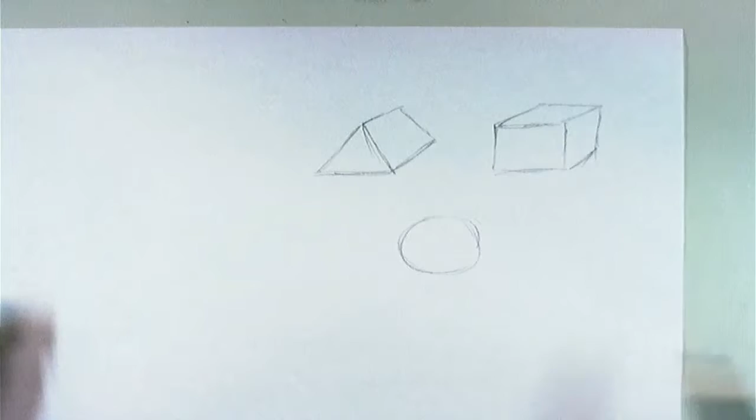So the idea I'm going to go for here is that I just have sort of an equilateral triangular block that goes back a certain distance. I've got just a cubical block, if you will. So a cube-shaped block here that goes back some distance. And then I'm also going to have a spherical block, which, well, you know, that doesn't necessarily look like a sphere right now, but something that can help communicate that in some sketching is some shading.

We know that the underside of a block would be darker if the light was coming from this way. Maybe there'd even be like a shadow on the ground around it. So those are actually some things that you can do. You could even do that to these to give them a bit more of a three-dimensional feeling if you're sketching things, and maybe a little depth, is to add in some light shading or something like that. Think of where your light source is, and on the opposite side of that, if your light was up here, the sun or something, this is what these are going to come out looking like. So that's the first step, is to just conceive of the idea.

Now, of course, the next step we have is we have to figure out, well, what are going to be the sizes on these? And something you can really do is you can say, all right, I'm going to actually sketch right on here. And I'm going to say, let's say this is going to be 3 inches. Now, this is not drawn to scale, so this is definitely not 3 inches tall, but that will still communicate our idea. Maybe the distance from this point to this point, from the front to the back, is also going to be 3 inches. Actually, that might be a little weird. Let's do 2 inches. Let's have it be shorter. 2 inches.

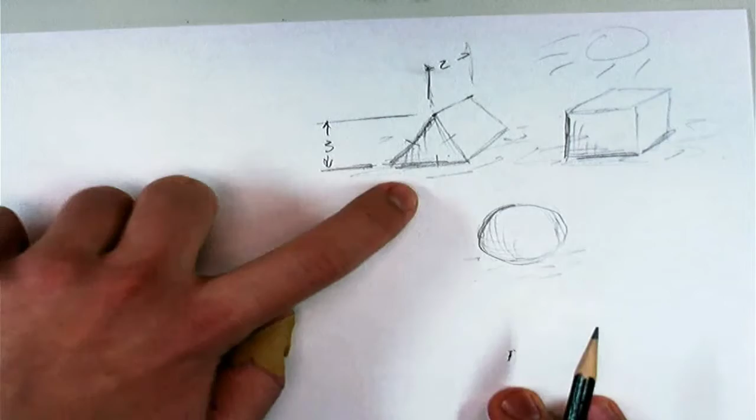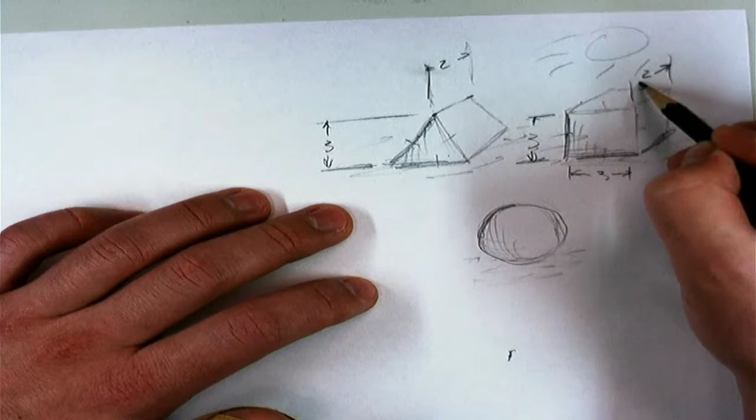And then I also know, let's see, I've got the height. Oh, and if this was equilateral and all these sides are the same, you know, we could put little hash marks on them to show that. This is obviously a square here, so let's stick with the same amounts. Let's go 3, 3. And remember, the way we sketch our dimensions should be the same as the way we draw them. A starting point, an ending point with the arrows in between. And then let's go for our depth. Let's go back about 2 inches. So this can really help to solidify the sizes that you're thinking of.

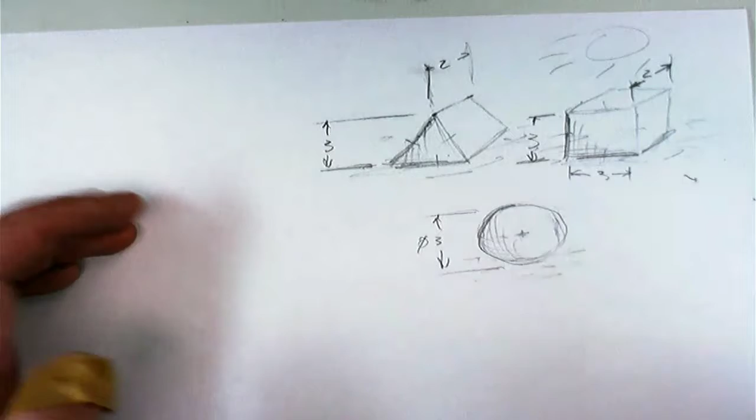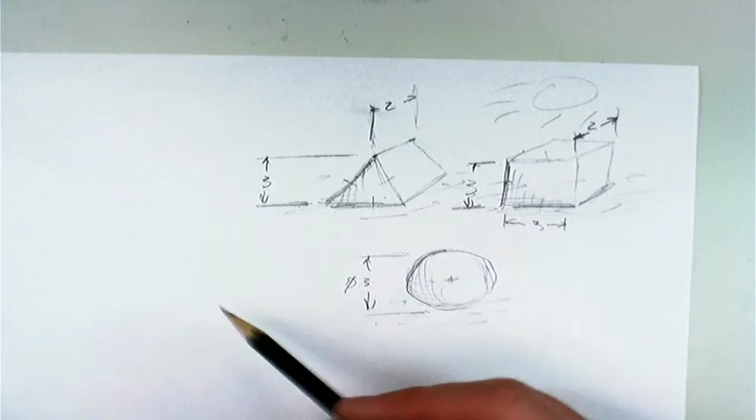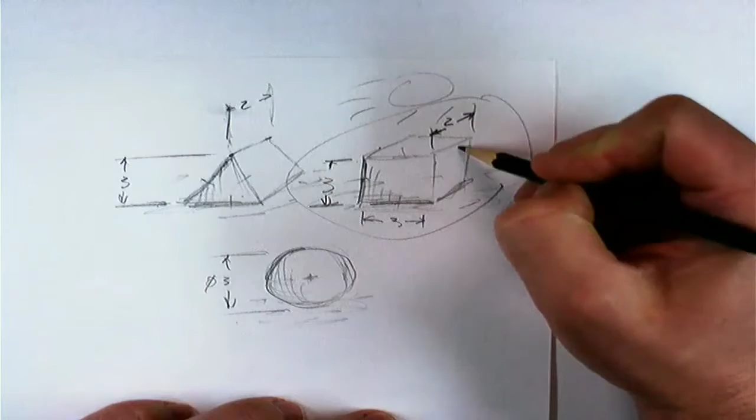So cool. So we have the rough sizes down, but now let's get these into like a front, top, and right side view. So we're going to have to think a little bit about geometry. I'm going to start with this one because it's definitely the easiest. I'm going to actually grab a separate sheet of paper here because I think it will make it simpler. I'm going to keep this off to the side and I'll pull it in when we need it. But so we're working with this cube shape, which we actually said is 2 inches deep. So you know what? I'm going to make that look a little shorter because it's going to be shorter than it was long.

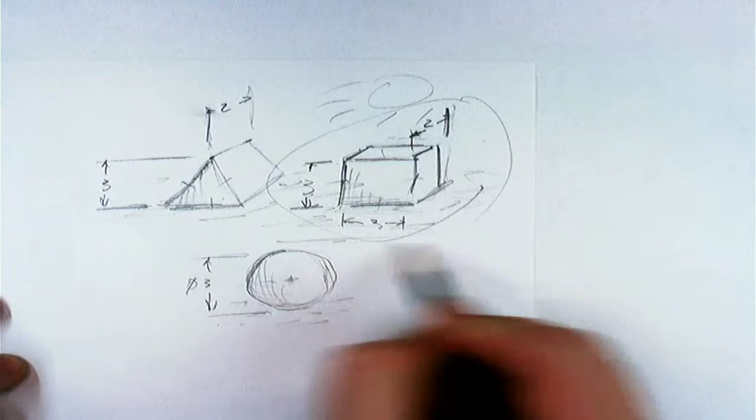Right about there. Cool. Great. Now, okay, square. So our front view of the square, imagine that we are a person. If this was all the ground all over here, we are a person standing with our feet on the ground right in front of this, and we are looking with our eyeball. That's our eyeball. We're looking right at this front surface. So we're going to see a square, and that square is going to be 3 inches wide and 3 inches tall.

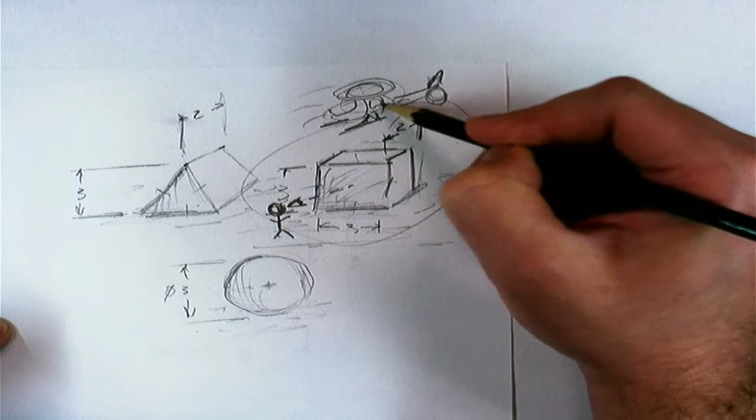And then we have to think, how's this thing going to look from the top? Well, we can imagine that we are in a helicopter. I always like to use a helicopter. There's sort of the tail of a helicopter, that spinny thing on the back. There's like the cockpit window thing. There's a little skid so it can land. Beautiful. We are like looking down from this. Here's a door with a window. There's a little guy and he's hanging out of this and he's looking downward with his eye and he's seeing this top surface.

And the way we do that, remember, you don't even have to think that way. We can just project lines up, and of course we'll be using our T-square and our triangle. Project lines up and then set a line for the starting point. We know we should leave in between here about a 1.5 inch gap when we're actually drawing it. So that's the front, and we know that the distance going backwards we said was 2 inches. So if this was 3 inches, break that into 3 parts. From here to here is about 2 inches. So sometimes I even bring my fingers and I don't move them, and I say, there's my depth, 2 inches deep.

And this is still the sketch. Okay, 2 inches deep, and we can label that. Let's label it on the same side. We'll put a 2, our arrows. And now we have our block sketched out. So this is what it's going to look like when it ends up on that piece of green paper. And I'm going to go through how to put these on the green paper later on here. But let's do the rest of these now.

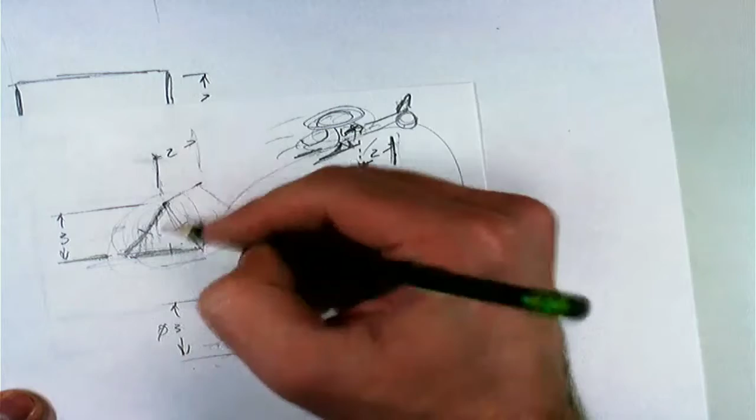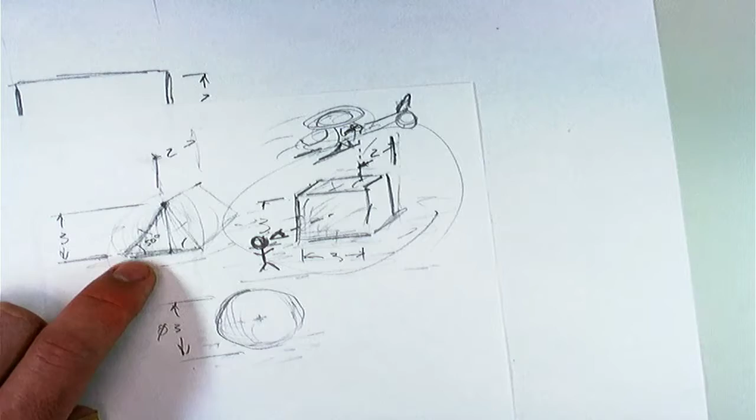Let's look at this triangle here. Now this is a little trickier because we have to say, well, how can I make sure that all the sides of this triangle are actually going to be equal? Well, I definitely know that, let's see, we can't do a circle because that would be bigger than what we want. What I can do is I can break this into 2 triangles, 2 right angle triangles. And if I know that this is 3 tall, I can draw a line up that's 3, and I'm going to also know that all these are 30 degrees, or am I mistaken? There's 180 degrees in a triangle, so 180 divided by 3 is actually 60 degrees. Excuse me. So we'll have 60 degrees for all the sides of this triangle. And with our 60 degrees on each of these triangles, we'll be able to do the rest of this.

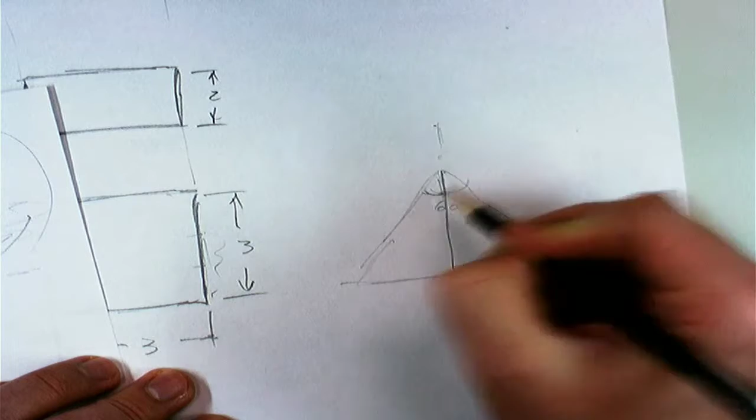So if we think about this, we would have a 3-inch, well, let's go like this. We have to think about the geometry. When we're drawing this on a piece of paper, we're going to start with some point. We're going to go up. We're going to draw a 3-inch construction line up. And then, if this whole angle here has to be 60 degrees, then this angle would be 30 degrees. And when we're drawing this on a piece of paper, we're going to be able to get our triangle and our T-square. So I'm just pre-thinking how I'm going to draw this so that I can figure it out. And we can use our 30, 60, 90 triangle. Oh, look at this right there. Oh, that's the wrong side.

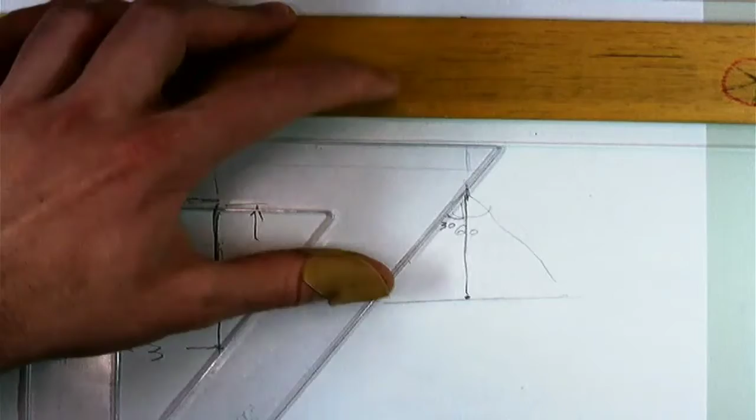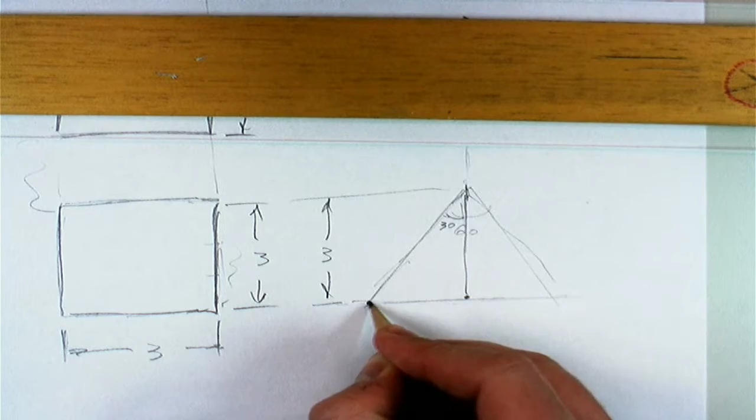And we'll be able to draw a line up. We'll be able to line up our triangle, get a 30-degree line down. Right, from there, we can flip this around, get our 30-degree line down. And remember, we had made this line 3 inches, just like we wrote in our dimensions on our original sketch. It was 3 inches tall. And we can draw these 2 lines coming down. And then we would just connect these 2 from the bottom of the line, draw a line across. And again, I'm going to show how to do this later, but I'm thinking about it now as I'm sketching, so that I can make this all work real nice. All right, so that would be how we would get our triangle drawn.

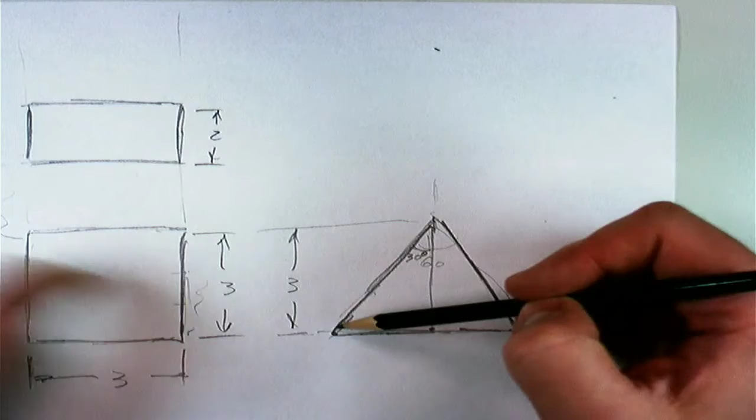And now the next step, of course, is to get our top view on in there. So just like we did for our square here, we would bring straight lines up for all of the edges. And that was a little uneven, but that's okay. We would space them 1.5 inches apart.

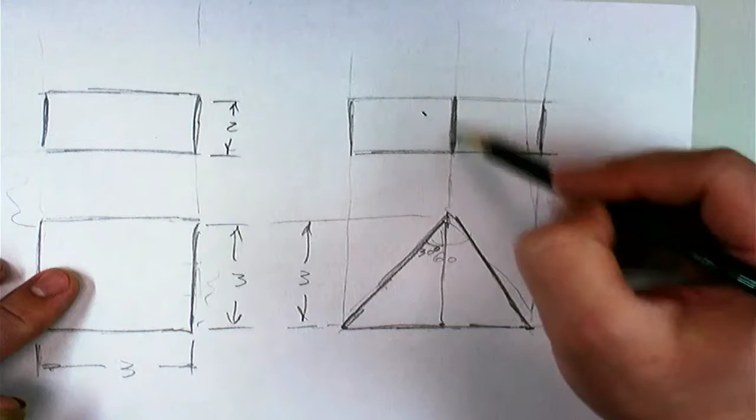And then we said that this one is also going to be 2 inches deep, just like the other one. So I'm going to look at that. It's going to be the same size there. And really, this is going to look very similar to the first one. It's just now there's a line in the middle, because if we're seeing a triangle from the top, that is what it's going to look like.

And I'm going to grab a toy here, so you guys can see this. I have some shapes. Right? Here is a triangle shape, equilateral right there, front view, top view. We're going to see that line right in the middle, and we're going to see the edges around the outside. So just to show you, a really straightforward example there, that is what that's going to look like from the top view. So hopefully that helps that make sense.

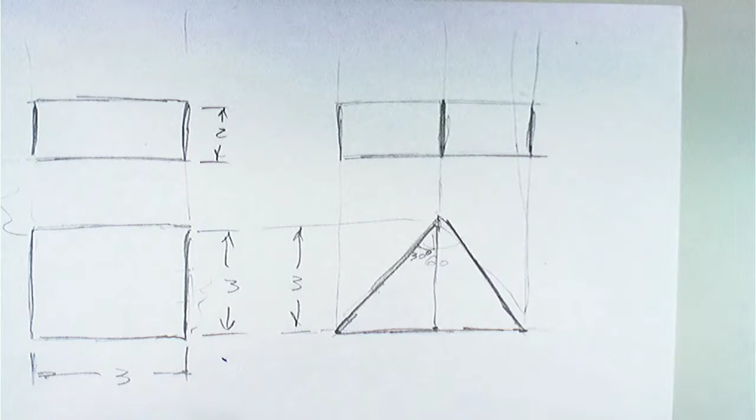Our sphere is, with a fresh sheet of paper here, really just going to be a circle. And you know what? I don't think we need to draw a front and a top view for this, because this is just going to be like you put a pencil compass on here and you're going to open it up to half of 3 inches and you're going to sweep that around. And then you can put a little note over here that says this object is spherical. And there you would have your drawing. So that would be that spherical part of that. You could get away with just doing one view for that, and that's okay for this assignment.

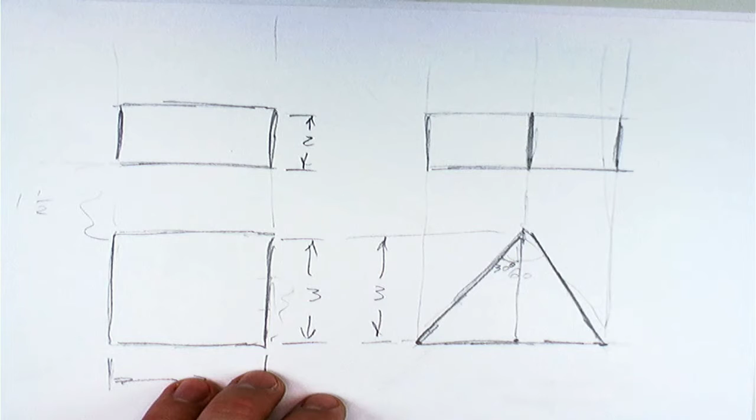So this is how you would sketch these out. I'm going to keep going, and I'm going to have how you would actually draw them now, so stay tuned for that coming up here momentarily. All right, so now I've got my green paper taped down here. I am going to go through and show how to add the title block to this, just in case there is anybody who still needs to see how we do that, needs a refresher, since this is in fact the first assignment of this course.

So I tape my green paper down with my T-square, using that to make sure that it's nice and straight. I am going to lightly mark. Actually, I should be using a 4H pencil. This is a 2H pencil. Do I got a 4H here? There you go. Where's a 4H pencil when you need it? I'm going to use a 4H pencil so that it's nice and light and I can come back and darken it later. But I'm just going to make a mark using the acrylic there as a spacer.

From the top of my page, I've got this taped on here so this doesn't work so well. So what I'm going to actually do is steal this distance by making 2 marks on a white sheet of paper. And I'm going to bring this up here and just line one of them up with the top. Otherwise, I'm going to bump into something with my T-square. So you could keep using the acrylic if you've got room, but because I'm working on this document cam surface, it doesn't work for me. So I use that to mark my distance.

And then, if you've got scratches on your triangle here, you can use that as the spacer to get your side marks on here. So I'm going to line up. It's hard to see with the glare right now, but I'm going to line up that line here with the edge of my paper so that I can get that distance. And then again, I'm in a weird situation because of the surface I'm working on here. I have to do this in 2 parts, but you should be able to use the long side of your triangle and line it up like this and just do the whole mark straight up. So do problem solve on your own there, but you can use my strategies.

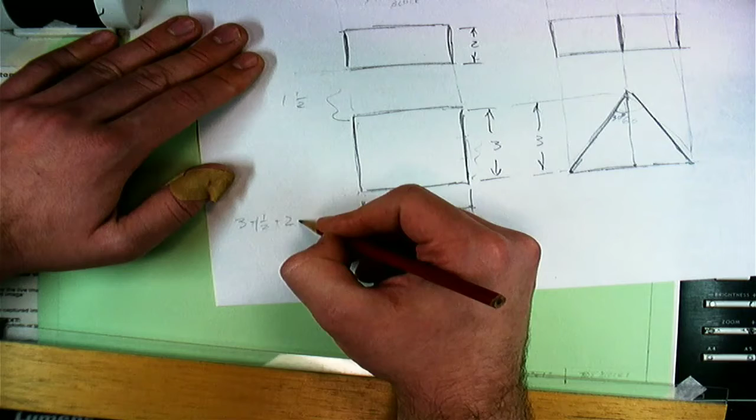Well, to figure out if it's going to fit, you can measure across here and say, how much room do I have to work in? Well, it looks like I have about 11 inches this way, and I have about 7 3/4 inches vertically. So if I can just make sure that everything is going to fit in that space, it's going to work well. I have a total of 7 3/4 inches to cram all this in this way. This is 3 inches from here to here, right? Plus 1.5 inches plus 2 inches. That's 3 inches, 4.5 inches, 5, 6 inches, 6.5 inches. Well, 6.5 inches is definitely less than 7 3/4. So this is going to fit vertically.

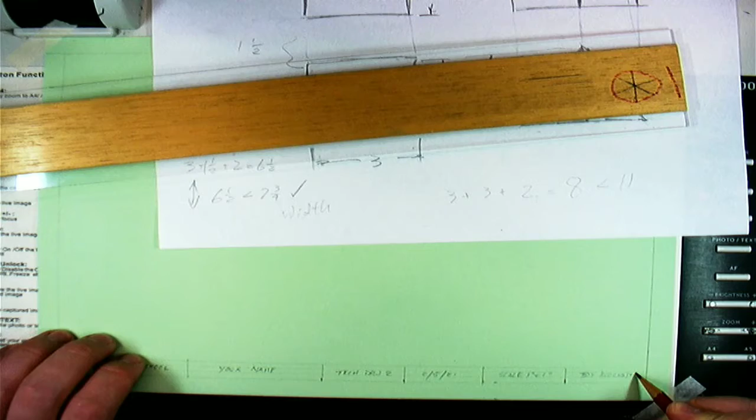And then let's look at the width. It's going to be 3 inches wide. So this was height. Width. 3 inches wide. I said I have 11 inches to work with. Well, the whole thing is only going to be 3 inches, right? So I may actually be able to get both of these on one piece of paper, because if I leave 1.5 inches between them, this would be 3, 6. Maybe I could even leave 2 inches. So 3 plus 3 plus 2 inches in between them, that's 6, 7, 8. 8 inches is still less than 11 inches for my total width of my green page. That's going to fit. So I'm going to actually change this to toy blocks 1 and 2. And like I said, I'm leaving 2 inches of space in between them.

So the total height of this, if I'm trying to lay out these drawings on this page and I want to center them, the total height of all of these put together, if I were to draw a big box around them, like with this highlighter here, I want to know how much this drawing area is so I can find the center of it and then go 1 inch out to start this drawing, because I left 2 inches in the middle, and then 1 inch this way to start this drawing.

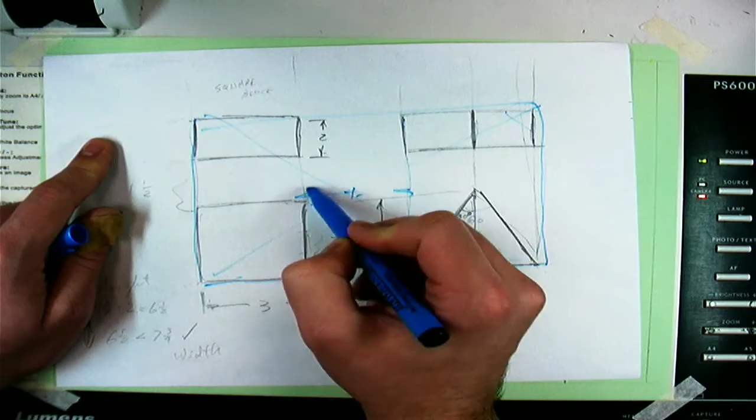So the idea is chopping things up, breaking them down, finding a point you can work from, and going off of there. So I am going to calculate that total height. Well, we figured that out. It's 6.5 inches, 6 1/2. And then this overall width here was going to be 8 inches.

So basically, if I find the center of this and I come over half of 8, that is 4, right? If I come over 4 inches, so from here to here is 4 inches, and then I come down half of this distance, which is 3 1/4, that is going to bring me to this point. I can draw this drawing, then I can go over 2 inches, I can draw this drawing, and it's all going to fit on this green piece of paper.

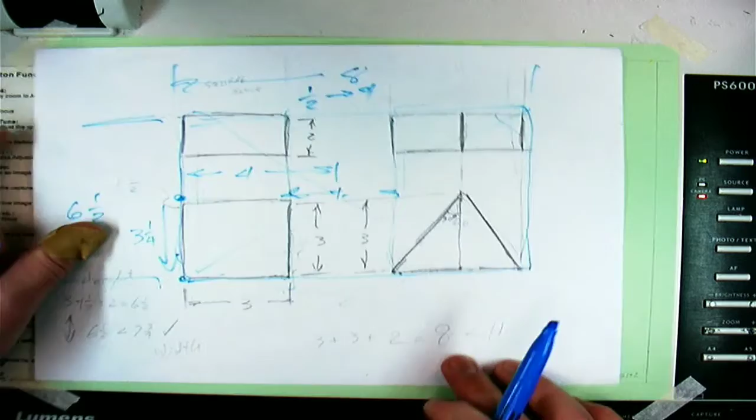So that's what you gotta just think: how can I break this down? How can I make this easy for myself to make sure that it's going to fit? So I'm going to start by finding the center of the whole sheet of paper, because I want this box to be centered on the whole sheet of paper. And then I'm going to find that point, and then I'm going to start drawing my block.

So to find the center of the whole piece of paper, we know we can use diagonals, or we should know. So I'm just flipping my T-square over, making sure the two corners are touching. I'm going to draw a light diagonal line there, and then I'm going to find the spot where everything crosses this way. All right, so that's the center of my page.

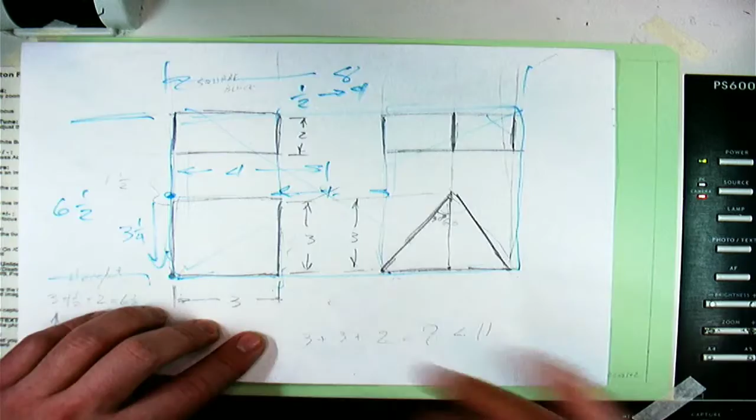And now I want to go over 4 inches and down 3 inches from there, which I am going to do like this, over 4 inches. And I'm cheating. I'm not really using the T-square right now, but it would be good to, so make sure that you do if you can. But for this part, we can just kind of eyeball a little bit.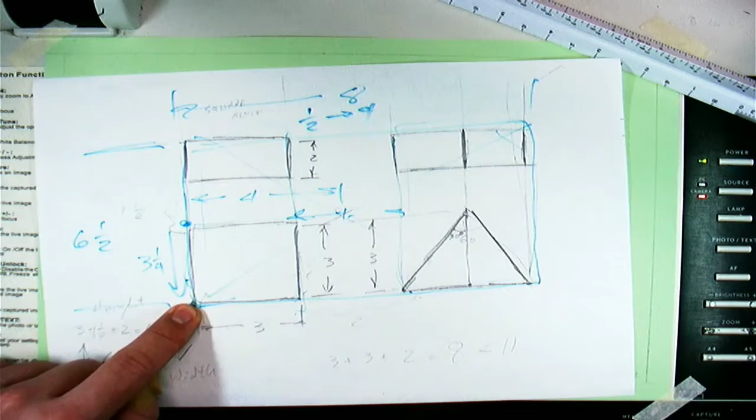So I'm coming down 3 1/4, and that's going to give me that corner right there, which corresponds to this corner for this block. So I know that if I start drawing this now, I'm going to have a line that goes 3 inches, 3 inches. I'm basically going to draw a 3-inch square.

So I'm going to make a light line of any length, and then I'm going to mark on that line 3 inches over. Then I can come in with my triangle, and I can make a line that goes straight up through that mark. And then I'm going to mark on that 3 inches as well. 3 inches up is about there. Then I can bring that line straight over.

I already know where this part ends, and these are super light, but you should still be able to see them, because we want to keep everything super light. Come up, and there is the rough outline of my square. To create the top view, I'm just going to bring more lines straight up. Well, I've already got them, right? So we'll project these upwards. I got to try not to bump into anything there.

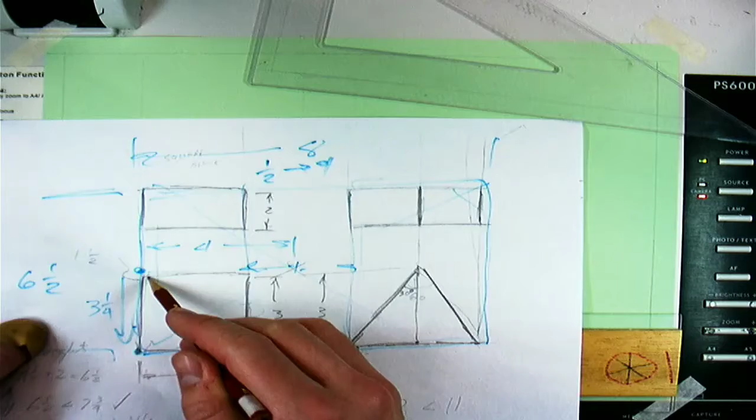And we know we have to have 1.5 inches between the views. We wrote that down before, so I'm just going to measure up 1.5 inches. And I'm going to hope and pray that this all fits, but I think it's going to. This is going to be 2 inches deep, so I'm going to measure up 2 inches from my 1.5 inch mark and draw 2 horizontal lines. And now I've got my block drawn.

I just need to erase and darken these. And I can do that very easily using an eraser shield. I get in here, clean things up. And you might actually want to darken the lines and then erase. But anything like that is going to work for you to clean this up so you can get some nice looking drawings. Because then you're going to want to come in last and darken these lines by going back over them with your H pencil.

I like to do horizontal lines first and then come back and do the vertical lines second. There we go. Vertical. Vertical.

Vertical. Vertical. And we will carry on, and I'm going to go on to the triangle next over here. So I'm going to keep going with this. But if you get this now, you can stop or you can just keep watching.

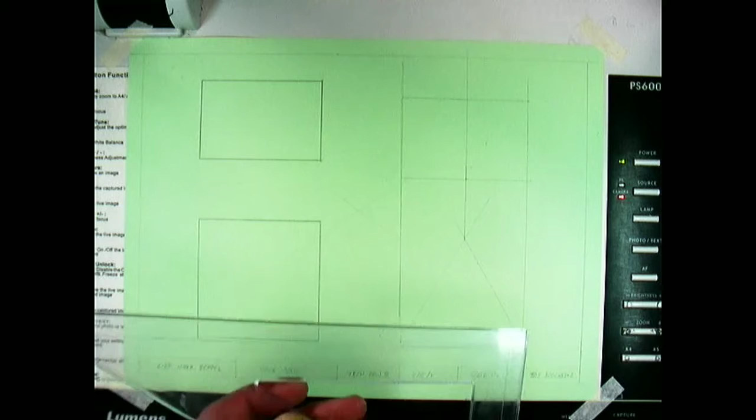And you know what? It's not perfectly lined up. We're going to roll with it. The spacing here is 1.5 inches. There are probably better ways I could have done this, but it's totally fine. Okay, remember, this is just a kind of opening drawing. I'm going to get in here and darken my lines now. So I can use the same tools I just did, but I want to make the lines nice and dark. Now I'm using an H pencil. Flip around, darken these.

I said I'd use the inner line, right? So let's make sure we're using that. Oh, I got like a weird shadow going on there. I don't like how this looks right here. That's a little better. Oh, I forgot the middle line. Cool. Now I have my front and top views of the triangle.

All right. The last step here is, of course, to add on our dimensions. And we already figured that out when we were sketching. So this is going to be 3 inches tall, 3 inches wide, 2 inches deep. And this is nice and simple. So I actually would want to put this dimension up between the views. So that's where I'm going to put it up there. And these two are fine on the sides like that. That'll be okay.

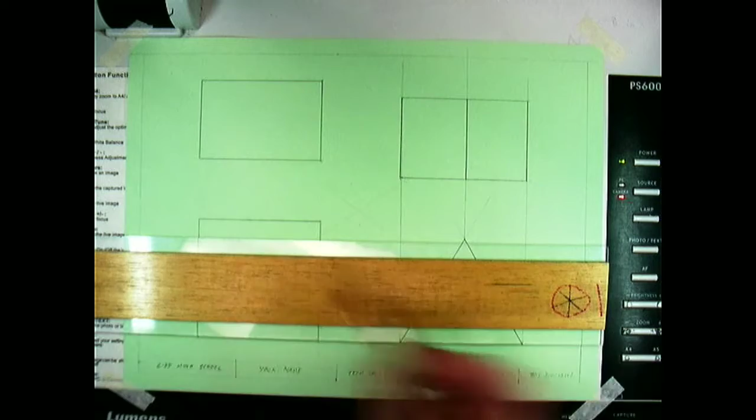So remember to space our dimensions. The real distance away that I want that arrow line is about the thickness of this plastic on the T-square. And those lines are going to come up, and we're actually going to leave gaps there. I should have done it in my sketch. I did it in all the other spots. We're going to leave a gap. So watch how I add this dimension right here. All right, remember, this is going to be 3.

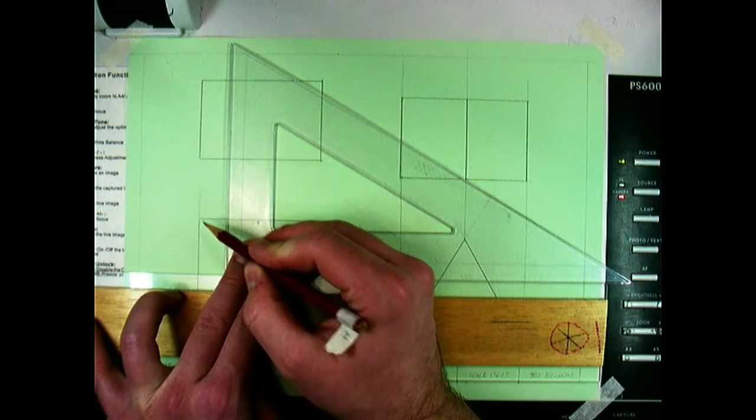So this is the technique you should use. I'm going to slide the T-square until the wood is right on that line. I'm going to lightly draw a line across. I'm going to get in here with my triangle. I'm going to get some vertical lines, and again, light so that we can darken them later. And I left a little bit of a gap. It's pretty hard to see, but there's a gap there. So it should not be touching the corner. About 1/8 of an inch gap if you want to actually measure it.

And then what I'm going to do to get the 3 in is I'm going to lay the widest opening on my eraser shield right on the line. And there's some glare there, so it's probably hard to see. But the dimension line is right in the middle of that opening. And I'm going to just write 3. And I'm going to make sure it doesn't go outside of the eraser shield. And then I can just darken everything in.

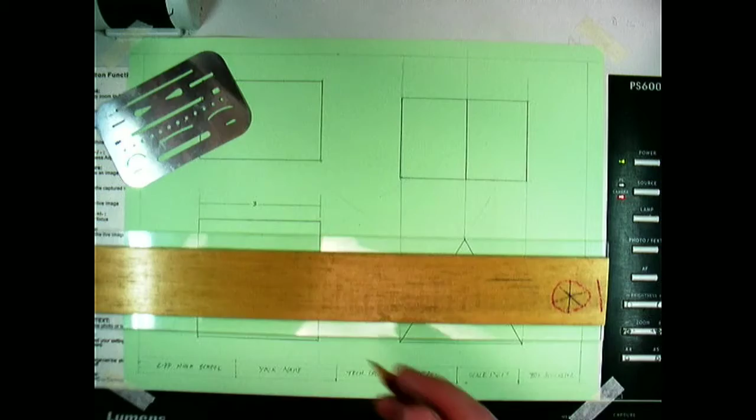And I was using H for just sketching. But when you darken this, you should use 2H. And that's going to give you nice, thin, dark lines that will be the correct heaviness in order to give you a nice, crisp-looking dimension line there. And, of course, if you've got little dangly lines, like I've got some stuff hanging off of the edges here, you can get in with the eraser shield and lighten those up as you need to.

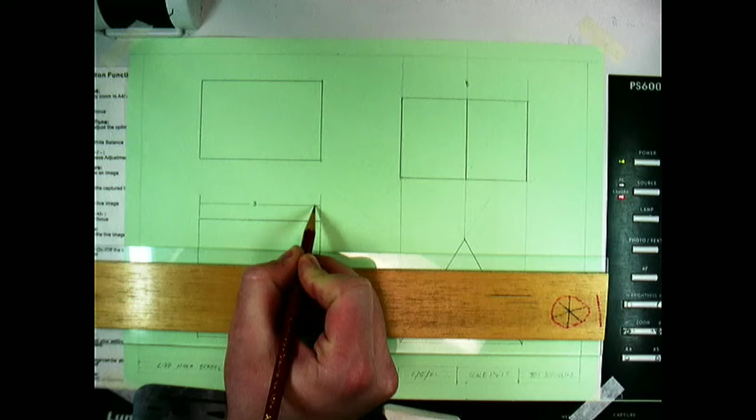Bam! And the last step would be to add the arrows. I would recommend putting all your dimensions in and adding the arrows very last. But if you want to do it one at a time, you can. It's just frustrating if you have to move these around. So I'm going to do this one. This one's a little different because the arrows are going up and down. So we'll use this triangle again.

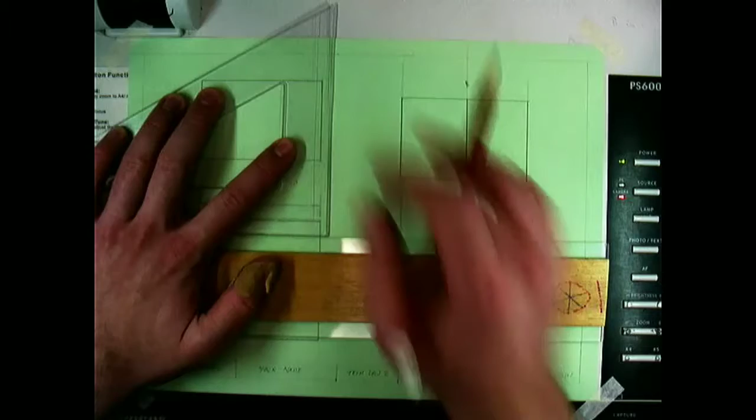Remember I talked about these scratched lines? Well, that scratched line is the same distance, because I scratched it on there with my pencil compass, as the acrylic on this thing. And I got to block out the light. There we go, because I'm getting glare. Okay. And I'm going to do the same exact process. I'm going to lightly draw a line like that.

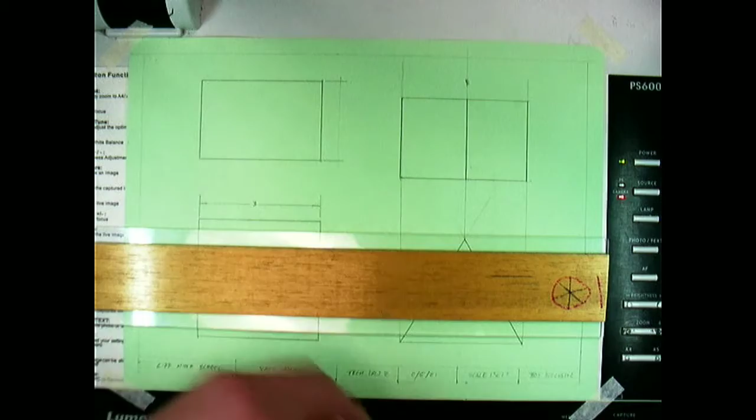I'm going to draw a line that extends off the edge, leaving a gap. Line that extends, there's a gap. So you can see the gap pretty well there. This gap actually isn't super clear, and we could make it a little more clear by using the eraser shield here just to clean that up. That's better. And this distance was 2 inches, so I'm just going to put in the middle, using my eraser shield again, a 2, and then I can darken all the lines and put the arrows in.

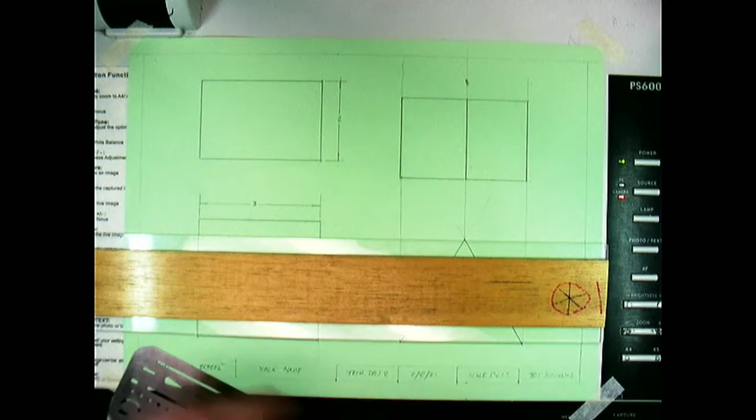And actually my extension lines, which are the ones on the edges that extend off of the object, are about dark enough already. So I'm just going to darken the dimension line, which is the one that gets the arrows. Long and thin arrows. They should be pretty subtle, but they're there. And I don't like this little bit that's sticking off there, so let me just clean that. And we need another one that lines right up with this down here. So I'll put that in. And you just keep going like this, extending your lines in the spots where you need them.

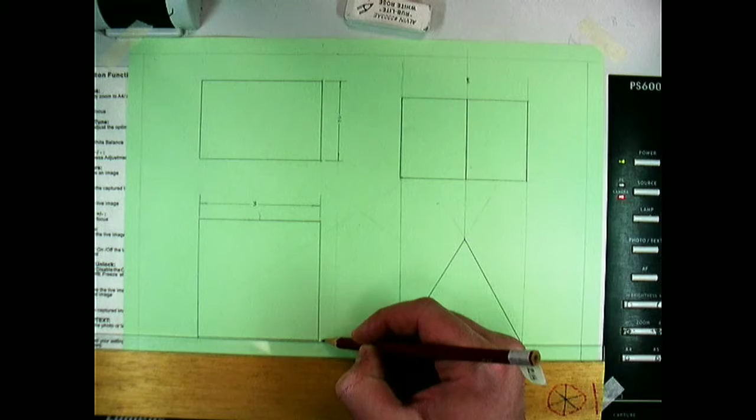Extension. You can actually draw the extension lines first. Maybe I'll do that for the triangle when I go through the triangle, and then come back and draw these lines later on. You can even leave a gap right away for where you think the number is going to go. The order doesn't actually matter. Like right now, I could darken this and leave a gap. As long as you are planning correctly, you'll be okay. I'll put a 3 in there. I'll put some arrows on. So that's all set now.

And let's just do this triangle over here. And I'm actually going to gently erase some of these extra lines because I think they're kind of getting visually in the way. We didn't need that one. We didn't need this one anymore. These were a little extra. Bam. Beautiful. Okay, those are off there.

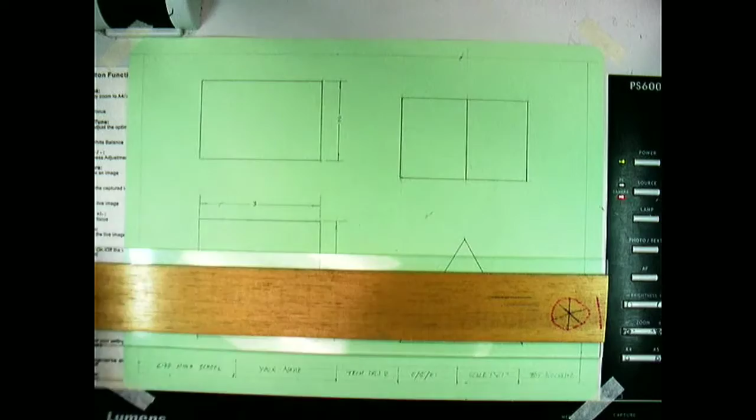And now, like I said, initially we said we were going to put the height, but I'm not going to do that anymore. I'm just going to do this side. Really, I could do dimensions off of all these sides, or I could put a note that says all sides equal. Okay, so that would work too, and I think that's the route I'm going to go. So I'm going to put this dimension on the bottom. So I'm going to go like this. I'm going to line the wood up with the bottom of the triangle.

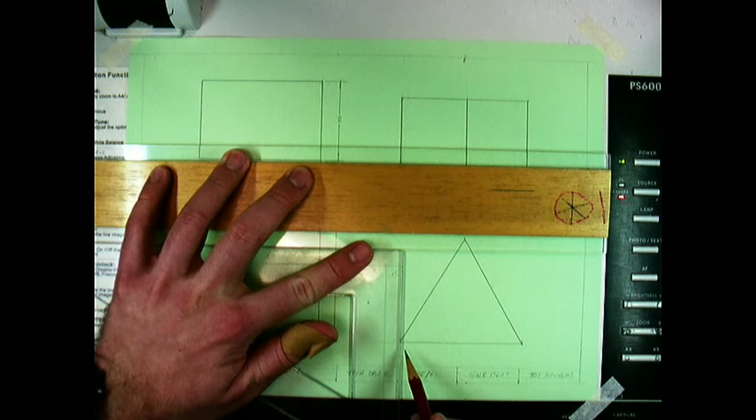Oh, you know what? I said I would do it where I do the extension lines first. So let's try it that way. So instead, this time, I'm going to go like this. And I'm going to draw, leave a gap, leave a gap, and then I'll line the wood up. Now I'll add in the line in the middle. Well, I did it a little dark, so I can erase a bit here just to leave myself an opening to write the number in. And we said this is 3 inches. So I'll write inside this again, 3 inches.

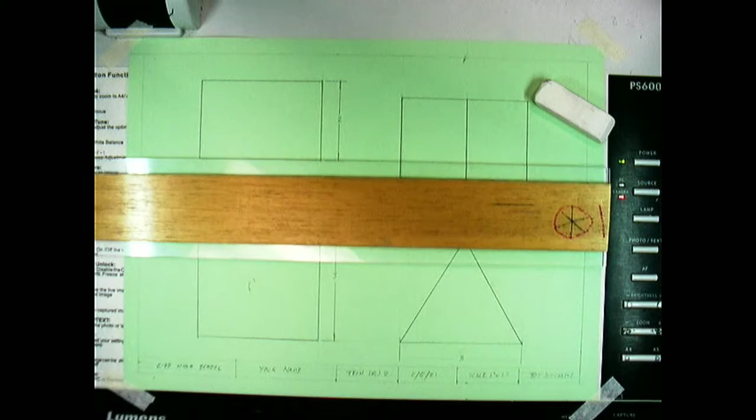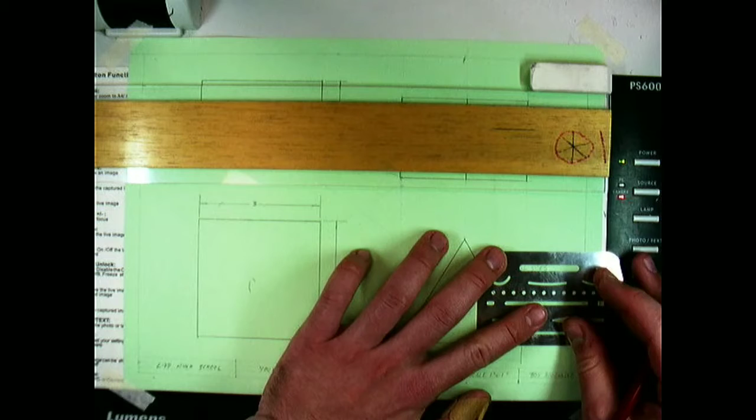Neat. And then, like I said, I'm going to put a note that says all sides equal. And I'm just going to do that here. I'm going to make sure this is straight. I'm going to look at it carefully, visually, and line it up. I'm going to say all sides. And if I have to slide this over, I'm going to be careful that it's still lined up, equal. Okay.

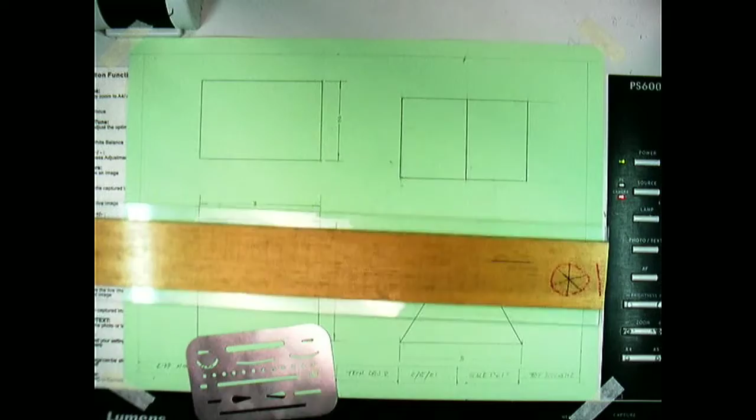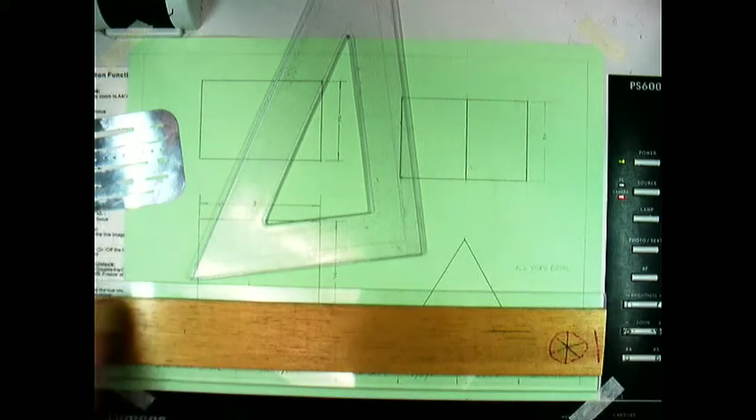And, oh, I got to do the depth, right? So like I did before, how about I try adding these extension lines first? So we extend the edge, leaving a gap, extend the edge, leaving a gap. Oh, and that's not a very good gap. So again, I will clean it. Okay. And then let's use the line on our triangle. Like that. Leave a space for the 2. And I'll write inside my eraser shield, I'll put a 2. And, you know, I'm going to shorten these a little bit too. That looks good. Great. And let me just add some arrows.

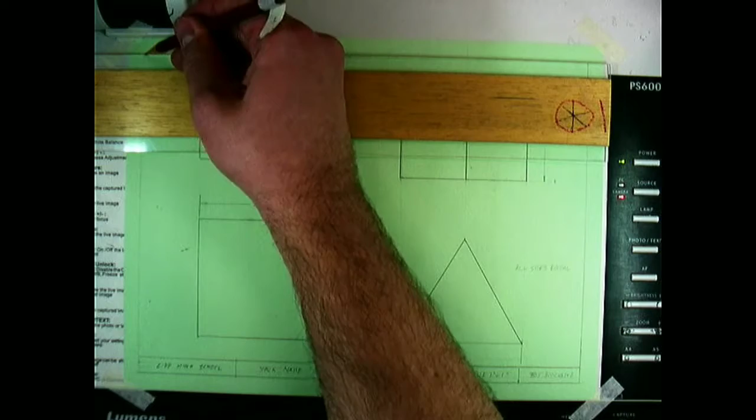And now, voila, you have completed this. Oh, aside from darkening the border, so that would be the last step, is to come along here and darken all of the border edges so that it looks nice and crisp. You don't have to darken the little guidelines we use down there. You can just go like this and go around the outside of that title block. Do your top line up here and do your vertical lines.

Why am I still doing this?

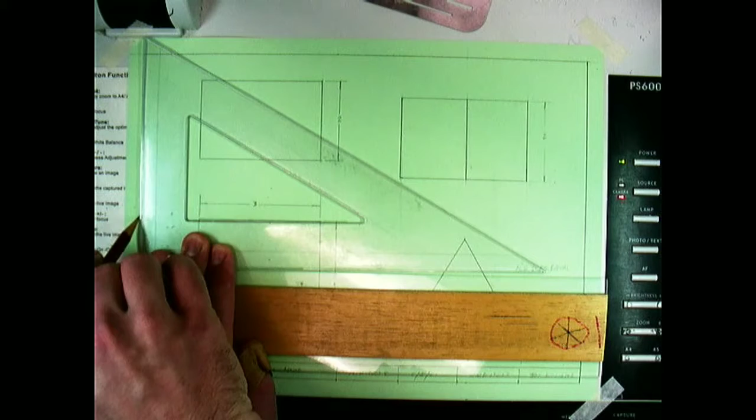And this vertical line, as you recall, I have to do this in 2 pieces because this arm gets in the way up here, the camera arm. Hey, there we go. That looks pretty good. So that there is a finished drawing, not a lot of lines. You can peel back this tape, get that off there.

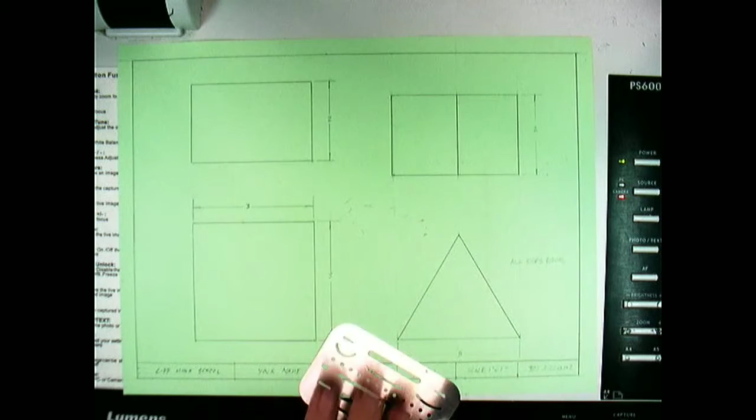So I will do the circle last. Oh, I don't have time right now, so I will finish that up, but I will have that in this video too, and you can watch all of this if you need it. If you're good, though, you can probably go right now and go start working on stuff. I'm going to also clean up. There's some other spots on this where I still see some lines that I don't really want to see anymore. So gently, if you're getting close to an object or you have a corner like that, you can clean it up by using your eraser shield. So there we go. There's a nice drawing. Really looking good, and all set.

All right, so this part of this video is going to show how to create a spherical object, which obviously is not super exciting here. It really just is going to look like a circle from both the front view and then the top view. Now, we would still project up and we would show it in the top view, and that would truly be the clearest way to show it, would be to show that in the front view and the top view, it is still a sphere. It looks a little smushed. That's because this lens distorts things a little bit, but you have to trust me that this is a circle.

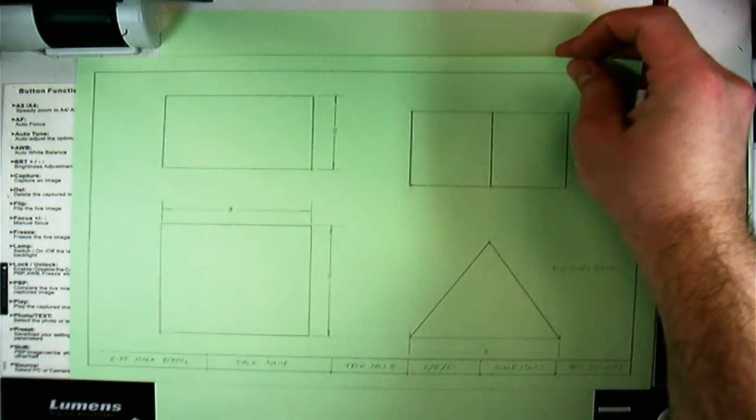The reason I'm doing this, if you'll notice, this paper is turned sideways. This is not the normal way that I would orient a piece of paper when we're drawing, but there's no reason you can't turn a piece of paper this way. But the reason I'm doing it this way is because it's just not going to fit if we do it the other way. It's actually going to be really tight.

In fact, if we think about how big this would be, if this has a diameter of 3 inches, and we need to do a front view and a top view, and this one is also 3 inches, and this gap in between is 1.5 inches, that's going to be 7.5 inches. That's going to be incredibly tight on our piece of paper here, where we only have 7 3/4 of an inch to work with. That's going to leave very little room at the top and bottom. So there's no reason we couldn't just rotate our paper sideways and give ourselves more room.

So I'm going to throw a border on this. I'll tilt this down a little. If you think about it, the border, we use the same principle that we did earlier. I'm going to lock this. There we go. Same principle that we did earlier of using the acrylic to get our marks on there, the acrylic on the T-square. So a mark there on the bottom. On the top here, actually, I am bumping into the top of that.

So I'm going to use another quick technique of just marking down on one side 3/8 of an inch and then marking down on the other side 3/8 of an inch from the top. And if you think about it, if those 2 points are both 3/8 of an inch from the top edge of this paper, then I can sneak in here with some object that does fit in. And as long as I connect those 2 points, it's still going to give me the right distance here. So there's lots of ways to sort of cheat the system and still get those distances in the way that you need them to be. I'm actually going to measure 3/8 of an inch in here too.

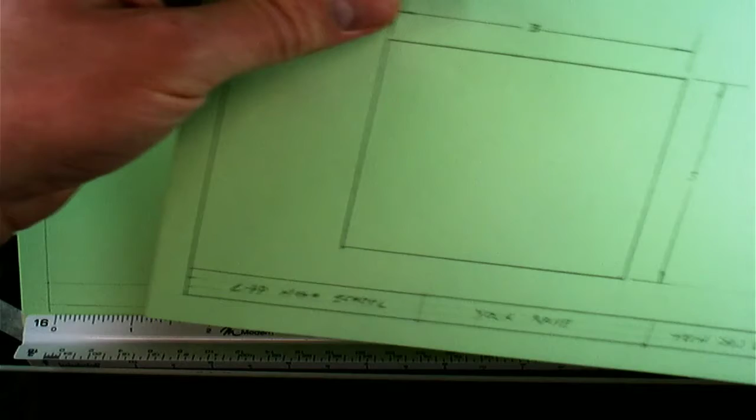But this part does not have to be perfect. Again, it's about the design and less about the layout. It's about the techniques you use to communicate your ideas, and it's less about perfecting the formatting. Because as long as someone can look at this and still understand the design that you were trying to get across, then you are still going to be able to communicate your ideas to another human being, and that's what matters.

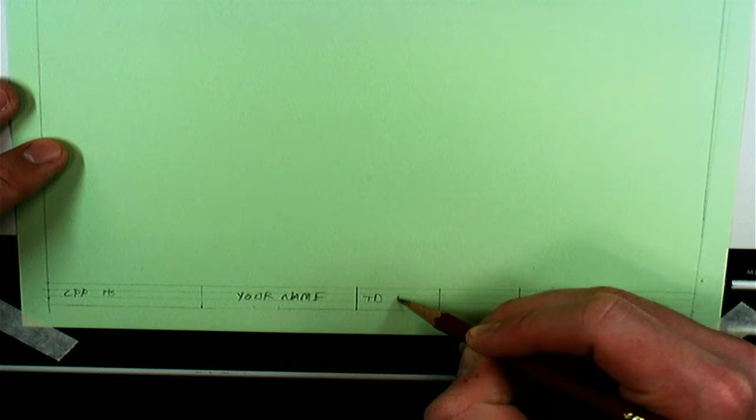I'm just adding my guidelines in now so that I can write accurately on those. Okay, and then I can do CPPHS, and I should be using a 2H pencil, but I'm not. You put your name, tech draw, I'm going to abbreviate to. I'm going to put the scale as 1 inch equals 1 inch.

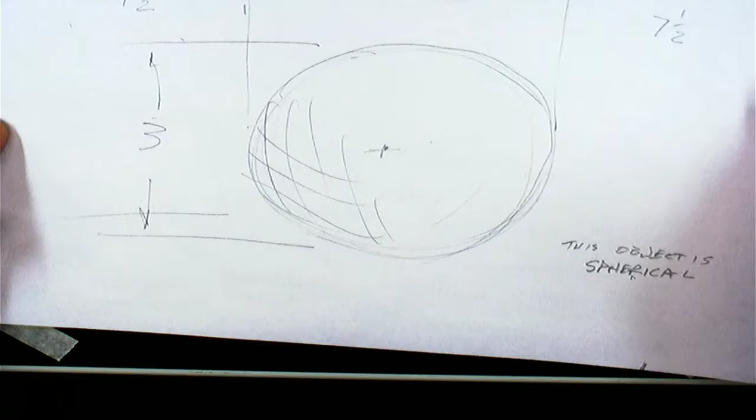Today's date is 2/5/21. And the name of this drawing, we'll call this Toy Block 3. Even though it's really a sphere and not a block, we're still going to call it Toy Block. All right, I'm going to straighten the camera out. Now that you can see how the title block goes on there, I'm going to start drawing this. We already figured out this is going to be 3 inches wide. It's going to be 7.5 inches tall.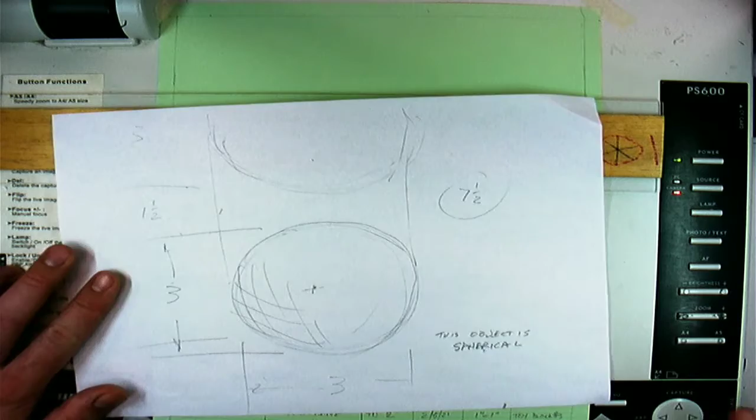Ooh, it is not focused. Focus there, camera. Hey, that's a little better. And let's turn the brightness down and make that a little, yes, contrastier. That's what I like to see. All right, I'm going to lock my menu again.

Okay, so it is 7.5 inches tall. It is 3 inches wide. So I know that I'm going to have to make a 7.5 inch box, and I'm going to have to center it on this piece of paper. We remember we can find the center of a piece of paper with our diagonals. And I'm going to get in here for this way. Let's flip this. I'm bumping into everything. So I'm just drawing diagonals right inside that drawing area. That's the center of our drawing area.

I need a 7.5 inch tall by 3 inch wide box on this. So by that, I really mean somewhere in the center of these two drawings. This is the same center point that's there. I need to come over half of the width and down half of the height. So half of 7, so I'm going to put a little 1/2 here, is 3 1/4. No, 3 1/2 plus 1/4, because half of 7 is 3 1/2. So 3 3/4. There we go. And the distance for the half of the width is going to just be 1.5. 1 1/2.

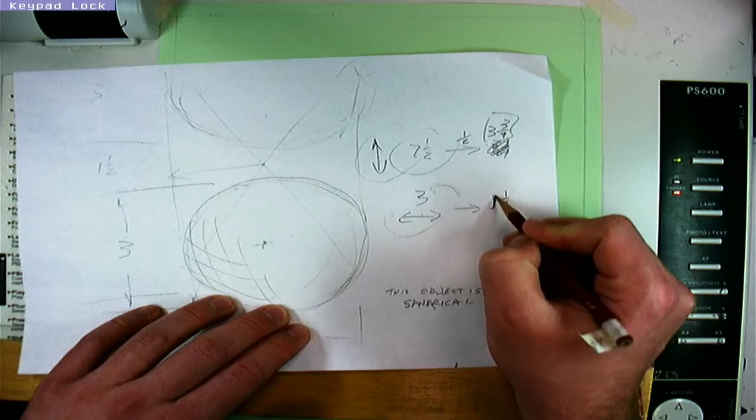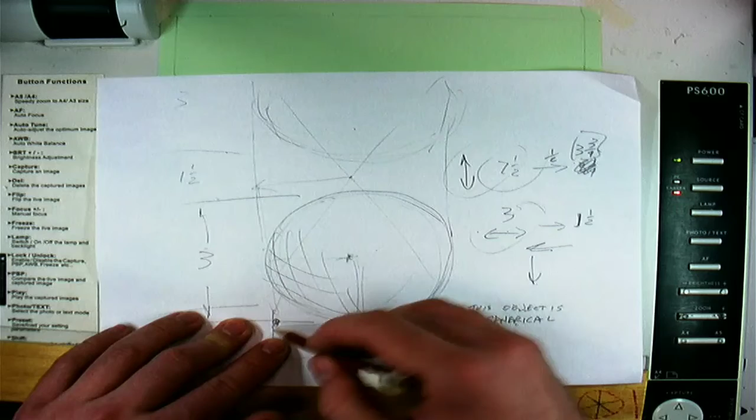So I'm going to come over 1 1/2, down 3 3/4, and that's going to get me to a lower left corner, and then I can find this center point right here. There's lots of other ways you can approach this, but I like to find a lower corner, because then we know from that lower corner, we're going to be able to come over 1 1/2, up 1 1/2 to find that center. It's all about placing it on the page.

If in doubt, I hate to say it, but you could probably pick a spot, draw your circle, and then try to work up. You just don't want to run into the edges of the piece of paper. So actually, now that I'm looking at this, there's an easier way. So you're seeing an epiphany taking place right here. Why would I come over and down to find a spot only to come back up to the middle when I could just come straight down from the center of my page?

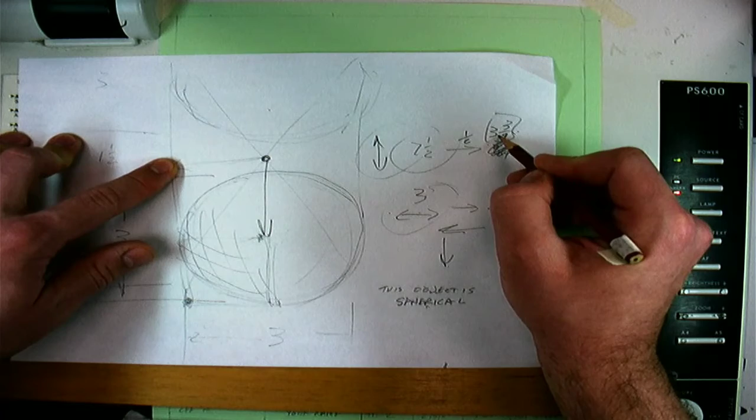Well, we could figure out how far that would be, right? Because if this is 1 1/2 inches up from the bottom, and our total distance down was 3 3/4, that means the distance from here to here, if I do 3 3/4 minus 1 1/2, that's going to get me perfectly to the center of my circle, to be able to space this stuff correctly. So 3 3/4 minus 1 is 2 3/4, minus 1/2 is 2 1/4. So that means this distance is 2 1/4.

2, 3, I'm just checking my results. Yes. So I'm actually just going to come straight down from the center of this. So straight down from the center of my page at 2 1/4 inches. So 2. Now, look at this. I'm not coming perfectly straight down because my ruler might move, but what I'm going to do now, just to ensure that that's definitely the right distance, is I'm going to throw a vertical line down from the center.

And there we go. So my point was a tiny bit off, so I'm going to go like this, and wow, I just found the center mark for that first circle there. So now that I've gotten this far, I know that I need a 3-inch diameter circle. So I'm going to set my pencil compass to half of that distance, which is 1 1/2. I'm going to just measure up 1 1/2 inches on one of these lines. So I put my 1 1/2 mark right on the center of the circle.

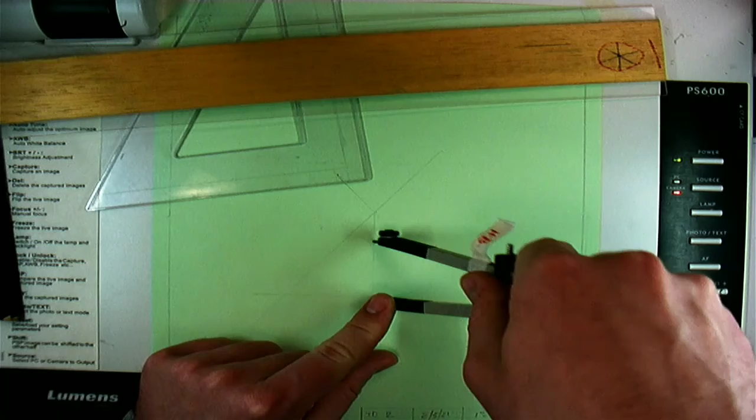And then I'm going to open my compass. Whoop, put it right on this. Wow, I nailed that. Maybe the last time I used this compass, it was 1 1/2. So I'm going to go like this. All right, that looks pretty good. Get me a circle on there. All right, there is my front view of this ball. And again, doesn't look like a circle because the view is a little distorted with the camera.

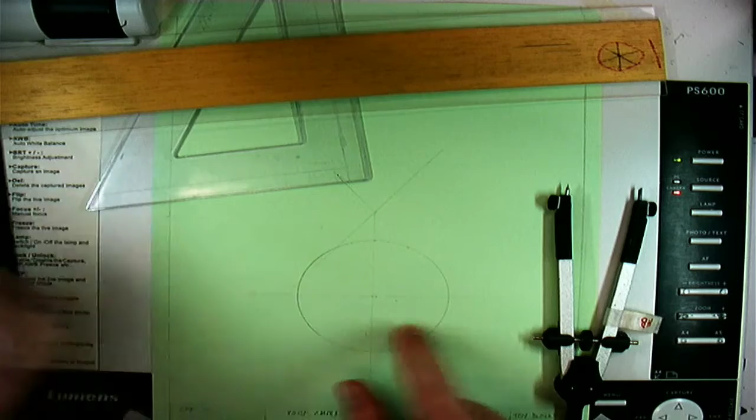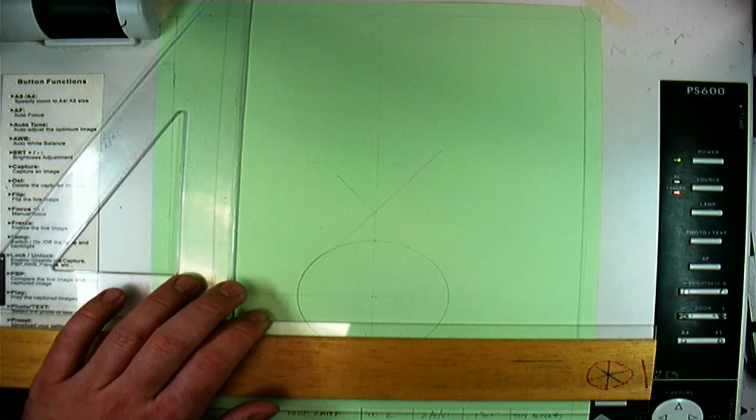That's okay. I need to go up from this 1.5 inches now. So I can measure up 1.5 inches on that line. And that 1.5 inches is the spacing that we're putting between the two views. I'm going to go up again. I'm going to go like this. You know what? I don't see why I couldn't measure up the same distance here, but let's do it a different way. So I'm coming up, there's the 1.5 mark. So this should be the bottom of the top view of my kind of ball-shaped block.

So I'm going to come up from that. I'm going to come up another 1.5 inches. You know what? I could even cheat. I can use this because I know this is set at 1.5, and I'll just put a little mark there. And that's got to be the center of my top view, which is going to be up here somewhere, right? And it got chopped off on the page. So I'm going to make that into a center mark.

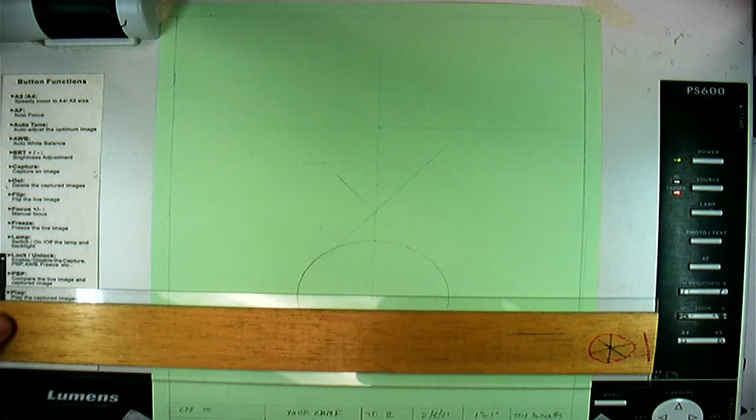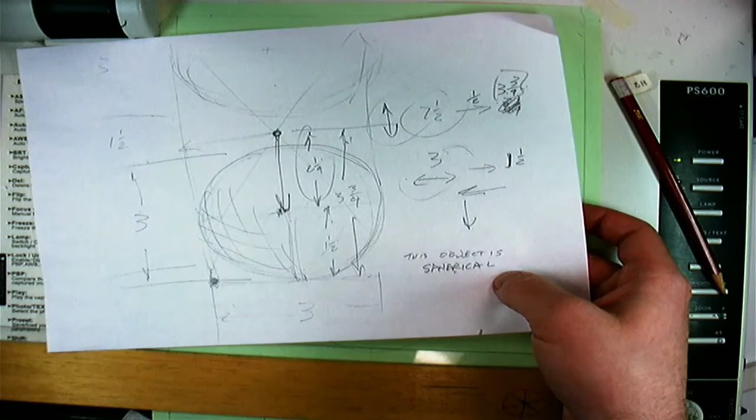All right, and then I'm just going to sweep me a circle. I didn't move my compass at all. And this is giving us the top view and front view of our ball-shaped block. Everything is looking good. Let's clean up some of these extra lines. And you might say, wow, that's a little ridiculous. Why did we just draw 2 circles? I did mention before, you could probably just put a note that says object is spherical. We could still do that. It wouldn't hurt to do that.

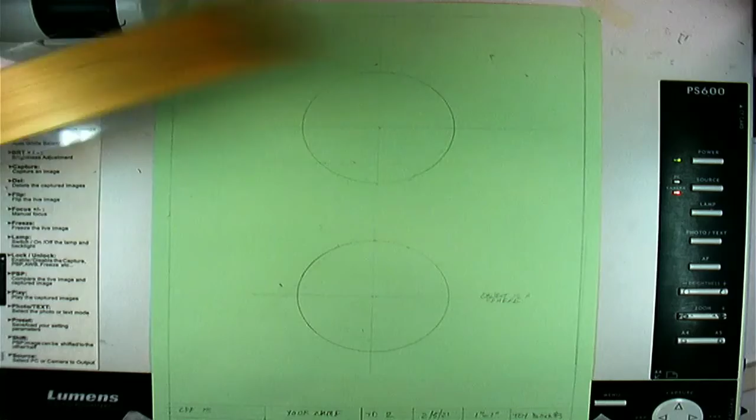So I'm going to put a note off to the side here using 2H to write my note. And I'm going to line it right up. I'm going to just use this line that was already here. And I'm going to say object is a sphere. And that is going to communicate everything that we need about this drawing. So, well, aside from a dimension, right? Now we need to know the diameter.

So if we remember, adding a diameter in a dimension form is super simple. You're just going to line up some straight edge so that it is going right through the center of the circle. And you're not going to draw a line all the way from the center. You're going to start out here, and you're going to make an arrow that's pointing at that circle. So there's the line. Let's do a little horizontal line now. And the arrow is going to point at the circle.

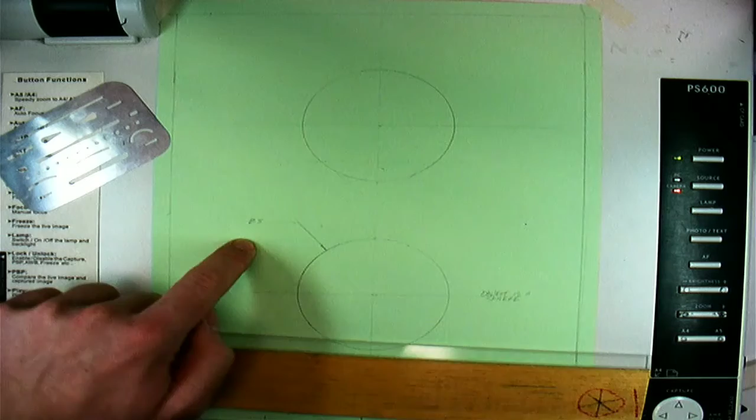And then you can just put diameter 3. And there you have your finished drawing of a spherical ball. So this would be appropriate. We have front view, top view. It's the same in both views. We have a note clarifying that the object is spherical. So we have dotted all our I's, crossed all our T's, and that is done.

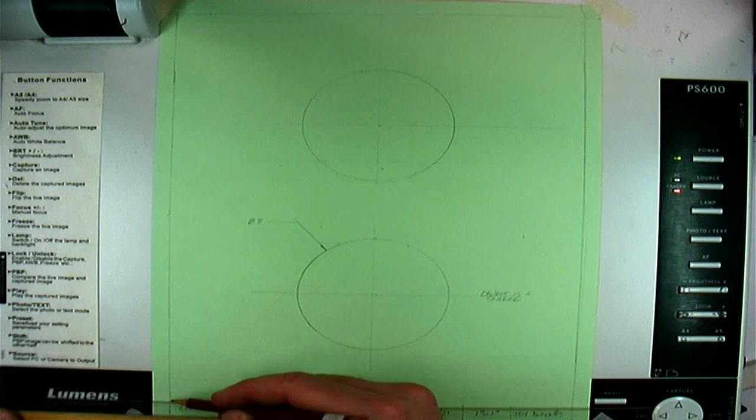The only thing left to do would be to go in here and darken up the border, maybe darken up those circles if they weren't dark enough already using an H pencil or something else like that. And I'm actually going to stop here because, as you saw before, drawing these vertical lines was annoying on the device that I'm working on. So we're just going to call that good.